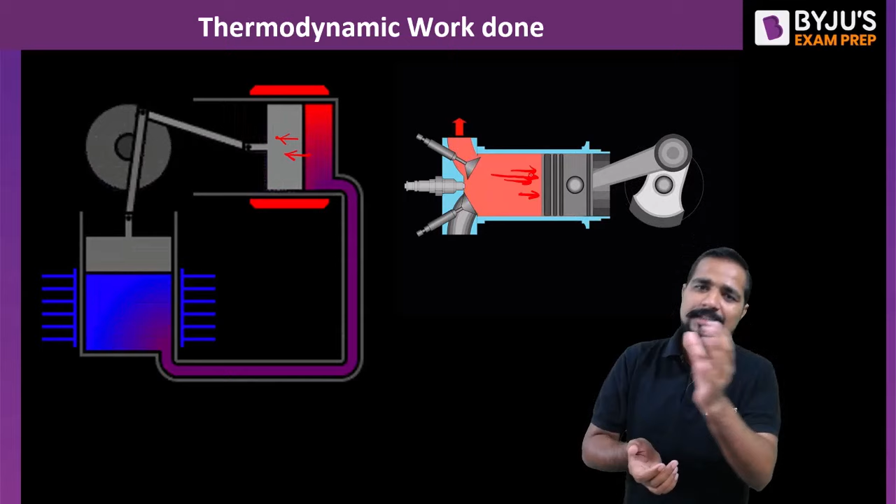As this piston is moving forward in this particular direction, this piston is displaced by some fluid. So we can simply say that energy is transferred from this fluid to the piston, or there is the complete displacement of the piston in the direction of the pressure applied. That's why we define thermodynamic work done on the next page: what is this thermodynamic work?

Work is said to be done by the system when the sole effect on things external to the system, or you can say the surroundings, is equal to raising a weight. Whenever you apply any force on the system, it is something like a weight being raised by the system, and in that condition we can say it is an example of thermodynamic work. Weight may not actually be raised, but its equivalent effect should be the raising of a weight.

I think from all these words or the definition, you are not getting the exact point. Let's try to understand the same concept with a very simple example. At this point, we have electricity, or you can say an electrolytic battery. After the battery, a motor is connected, and after that, this is the fan. You have seen this type of system many times: a battery connected with the motor, and the motor rotating a fan.

So in that case, can we say it is thermodynamic work done? And if it is work done, how can we connect this entire system with our definition of thermodynamic work done? Work is said to be done by the system if the sole effect of the system on the things external to the system is raising a weight.

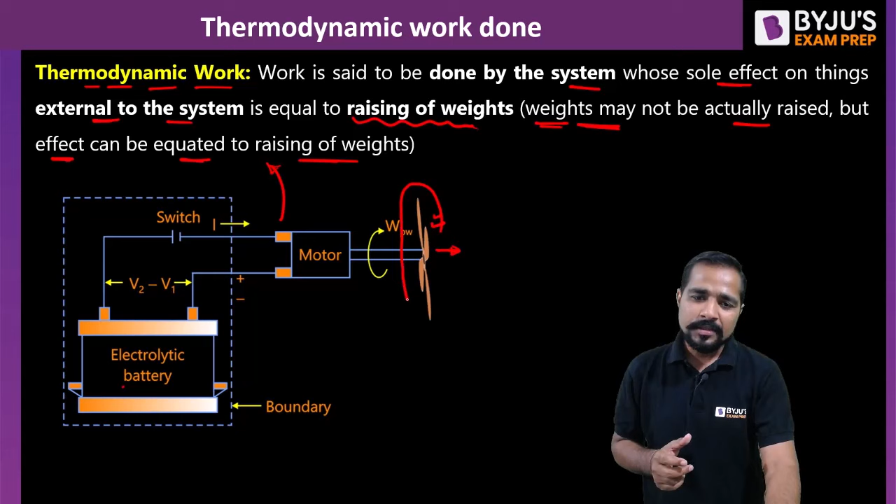What we can do in this case is replace the wings of the fan with a pulley. On the next page, the fan wings are replaced by a pulley like this. The rope is connected with the pulley, which is further connected with the weight. So we have the same battery and the same motor, and we have just made a small change: the fan wings are replaced by the pulley, and the rope is wrapped over the pulley and connected with a weight.

Now let's see the equivalent effect. The weight may not be raised in actuality, but its equivalent effect should be like this.

So now when you switch on this battery, your motor will start to rotate like this. And when your motor starts to rotate like this, your pulley will start to rotate in the same direction like this. And when your pulley starts to rotate in the same direction, we can simply say the weight is raising in the upward direction. Are you not feeling it in the bracket term? That weight may not be raised in the actual condition, but its equivalent effect should be raising the weight.

So in that condition, we can say either you take the example of this fan or the example of this pulley, then definitely work is done by the system. So by replacing the equivalent system, you will get a clear-cut idea of whether work is done by the system or not. After that, let's try to discuss a few more important points.

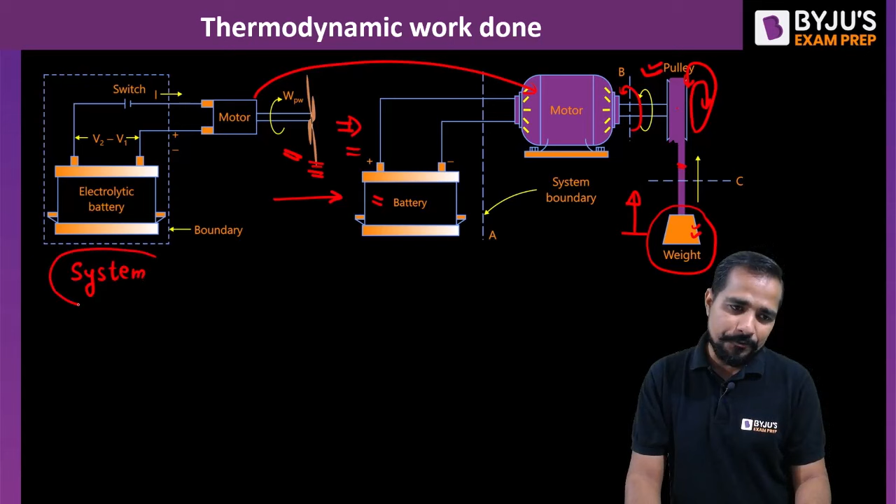In this work done, the system, or you can say the boundary, plays a very important role. Because if I ask a mechanical engineer what type of work is done in this case, most mechanical engineers will say, sir, mechanical work is done by the system. Mechanical work is done by the system. Do you know the reason?

The reason is very simple: when a mechanical engineer focuses on the system, he is going to consider the outlet of this entire motor as a system. This he considers as a system as a mechanical engineer. That's why, because the shaft is rotating, this is the example of mechanical work. But at the same time, if I ask the same thing to an electrical engineer, he can say that the work is electrical work.

Do you know the reason? The reason is very simple. He is going to consider this as a system, meaning between the boundary and motor he considers a system, and the flow of electrons is the work done in this case. So he can say yes, in this case it is an example of electrical work. Even though the phenomena of both figures are absolutely the same. In the first case, the same phenomenon is there. In the second case, even though it is the replacement, it is the same phenomenon. So if I ask what is the difference, the difference is only the consideration of the system.

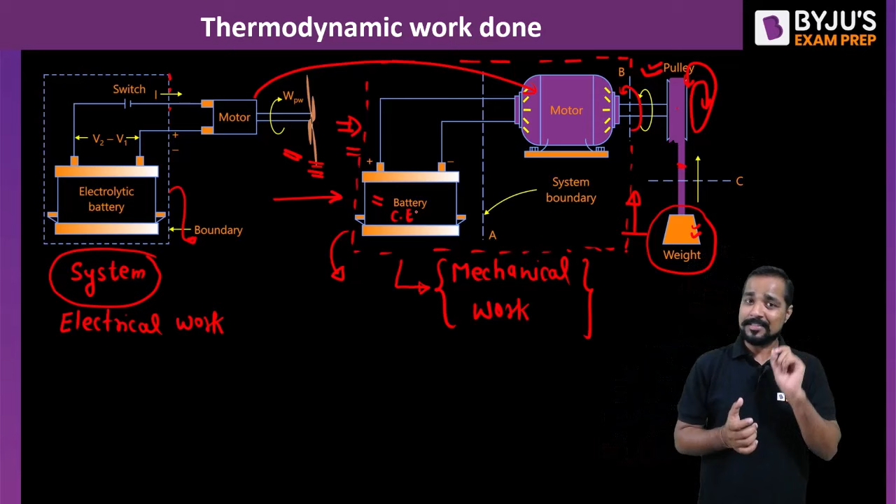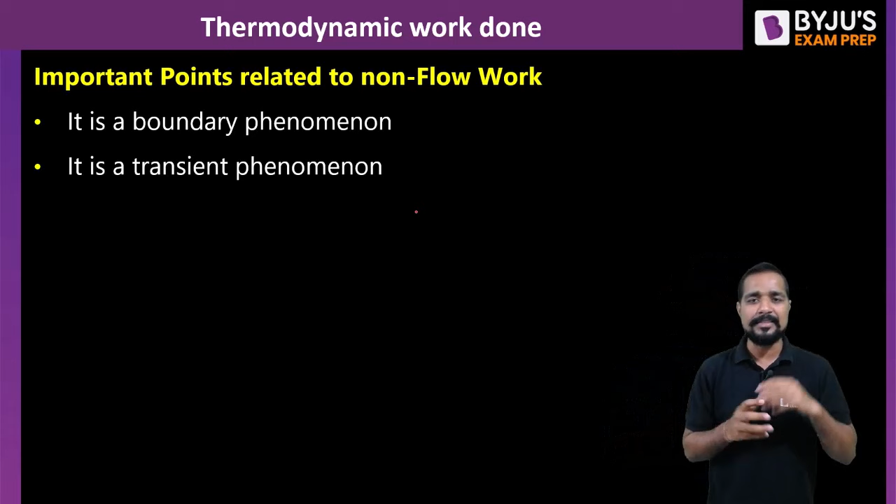also zero. But in between equilibrium 1 and equilibrium condition 2, the thermodynamic process conducted is the only condition to do work, either by the system or on the system. So we can conclude one more point from here. Work is a boundary phenomenon and work is a transient form of energy. It is not the stored form of energy. If you want to do work, then definitely there must be some change in the system, right?

After that, let's try to understand the meaning of the sign convention. Generally, if there is any system, then there are two types of work sign convention we can define. What are these? Either work can be done by the system or work can be done on the system. For example, if I decide the system, these are the boundaries of the system. In the system, gas is filled.

So whenever heat is supplied to the system, this gas will try to expand. And when this gas tries to expand, it will apply force on the piston, things external to the system. That's why we say that the system we have assumed is doing some mechanical work.

So in that condition, when gas is expanding and applying some force on the piston and the piston is moving in the upward direction, that is the work done by the system. It means the system is doing the work itself. We can utilize this mechanical work done by the system in some other form, whatever we want. Let's try to understand the same thing in another way. In the starting, the gas is somewhere like this at this position.

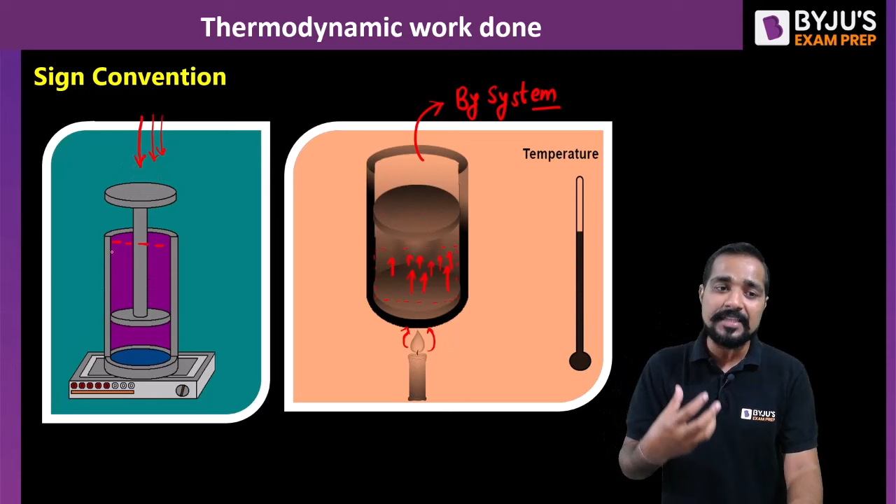We are externally applying some force on this system so that the piston is moving downward. Due to the piston moving downward, we are applying some force on the system, on the gas molecules. In the previous case, the gas applied the force on the piston. That's why work is done by the system. And in this case, we have applied the force on the system. That's why this is work on the system.

And in general, work on the system we generally write as a negative term. So when externally we do something on the gas or any particular system, work is done on the system, and that will be taken as negative. And when the system is doing something, and we can take advantage of that work to do any activity external to the system, that is the work done by the system. So I think the sign convention of work done is clear to all: what is the meaning of work done on the system and by the system.

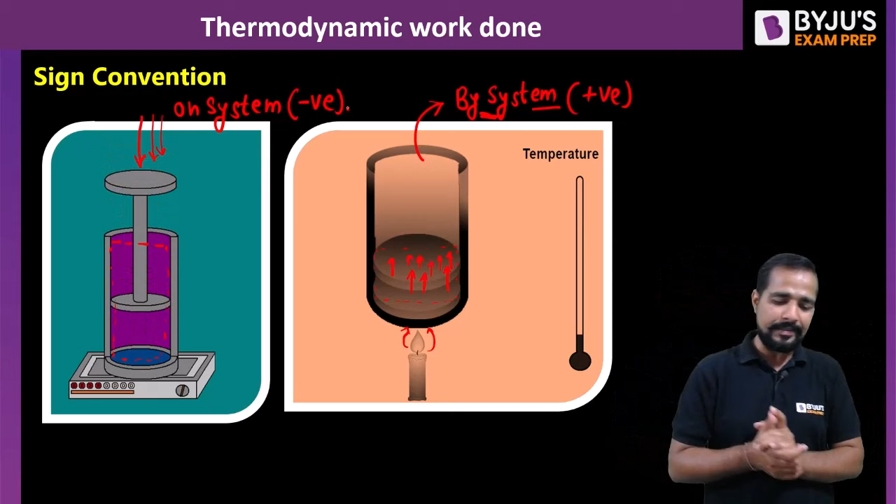After that, let's discuss an important point related to the main thermodynamic topic: how will you define the generalized form of thermodynamic work done for a closed system. Generally, if we take the example of the closed system, a piston cylinder arrangement, in this case one thing is very clear, no valve is there. That's why it is an example of a closed system. So we are going to derive the thermodynamic work done for a closed system after that.

Now, the gas is filled already in this chamber at a pressure of P1, and on this piston one stopper is attached like this in the starting. So right now you can say it is maintained in equilibrium condition 1. And at this point the position of this piston from 0, 0 is x1, right?

After that, we try to change, because work will be done whenever there is a change in the system. So if you want to change that system, we can simply say that the stopper is removed, and when the stoppers are removed, the system reaches somewhere here, that is the second position. So the system goes from equilibrium state 1 to equilibrium state 2.

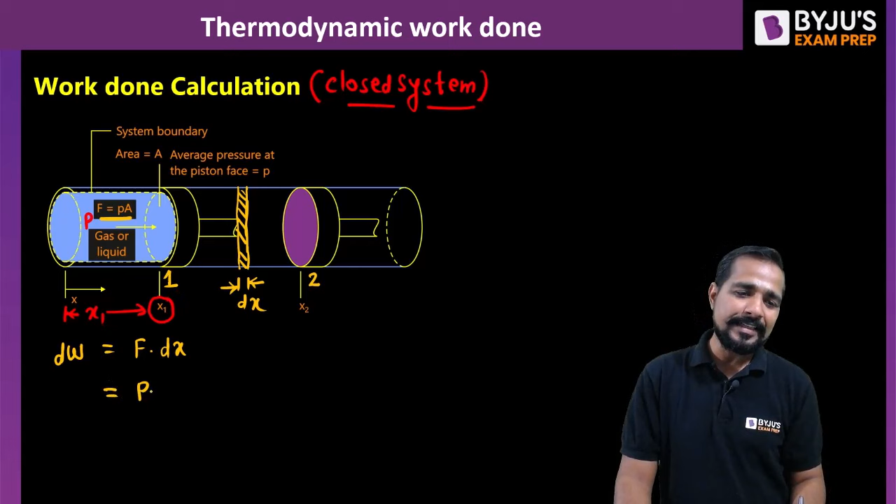If P is the pressure, then we can write it is P into A into dx. The cross section area of this piston is constant, and dx is the length the piston is displaced by the gas. So this will be the change in the volume. So work done can be written as P into dV. If we want the total work done from 1 to 2, it is the integral from 1 to 2 of PdV.

This will be the total amount of work done for a closed system undergoing a reversible process. Why reversible process? We assume the total inside pressure is converted into mechanical work, right? So this work done is valid for a closed system undergoing a reversible process. Is it clear to all? Yes, undergoing a reversible process.